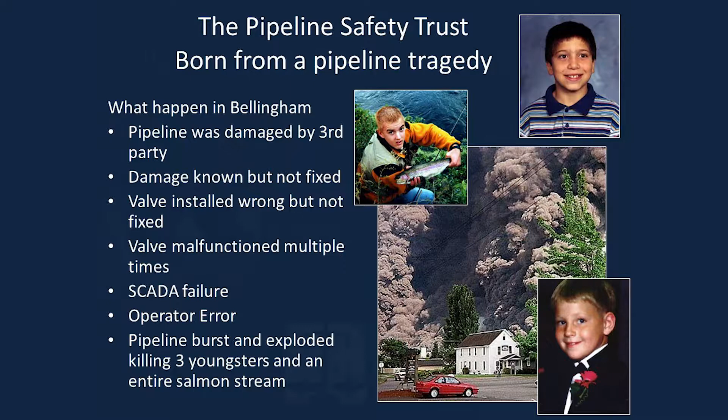As this case went forward, it was one of the few cases that has gone to criminal trial nationwide, and pipeline officials actually went to jail for a short time over this. But as the U.S. Justice Department prosecuted this case, they joined with the parents who had lost their children, trying to set up a national watchdog organization to oversee both the pipeline industry and the pipeline regulators, because they joined with the community there and were pretty aghast at the way the pipeline company had failed to maintain their pipeline and the regulators had failed to correct anything.

In the past, since 1999, we've done a whole bunch of things trying to improve pipeline safety. We're not against pipelines, we just want them to be as safe as possible. We've spent a lot of time in Washington, D.C., because all of the pipeline safety regulations start from there. So we're trying to improve the regulations. We've also tried to improve the transparency and the amount of information that's available.

In 1999, you couldn't find anything about pipelines on the internet. These days, there's so much available, in some part because of our efforts, that it's sometimes hard to know what to look at. We provide a public interest voice to the media a lot. I just talked to a couple of reporters just this morning. And then we partner with anybody that's trying to move safety forward, whether that's the industry, the regulators, or community groups. And we help with technical assistance like we're doing here this evening.

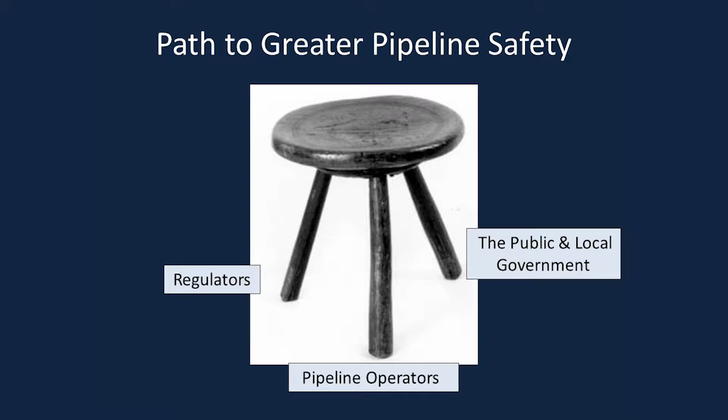One of our key beliefs is that pipeline safety is like a three-legged stool. To really have a stable pipeline safety system, you need all three legs. The operators and the regulators have strong legs because they have a key role in safe pipelines. The leg that's often missing in action is the public, and when I say the public, I also include local governments. Oftentimes, nobody thinks about pipelines until something goes very wrong or until there's a new pipeline being forced through a community. So we're really trying to strengthen that third leg of the pipeline safety stool.

Just to give a broad overview of pipeline safety, both in the country and in Contra Costa County, there are really two types of pipelines in the country. There's hazardous liquid pipelines, and those carry things like crude oil, refined products, gasoline, diesel, jet fuel, carbon dioxide, ammonia, and highly volatile liquids, which are things like propane and butane that are gas at atmospheric pressure, but when put into a pipeline under pressure, they move through as a liquid. So they fall under the hazardous liquid regulations at that point.

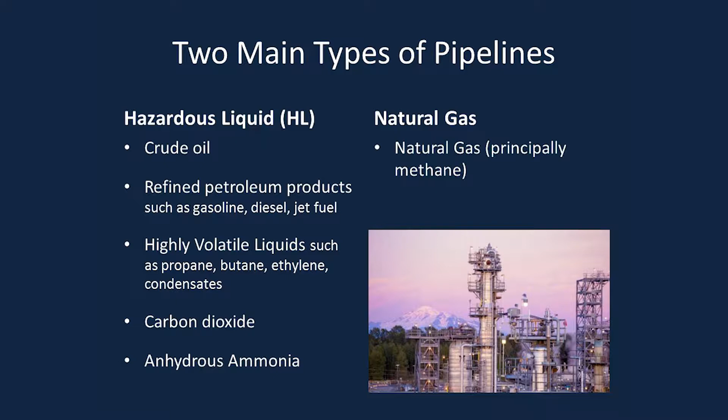The other main type is natural gas pipelines, like the gas we use in our homes, which is mainly methane. This shows a diagram of a typical natural gas system. On the left-hand side, the red lines are at the production side of natural gas where it's coming out of the wells, production and gathering lines. The blue lines are the big high-pressure transmission lines that move natural gas between communities, between states, across the country.

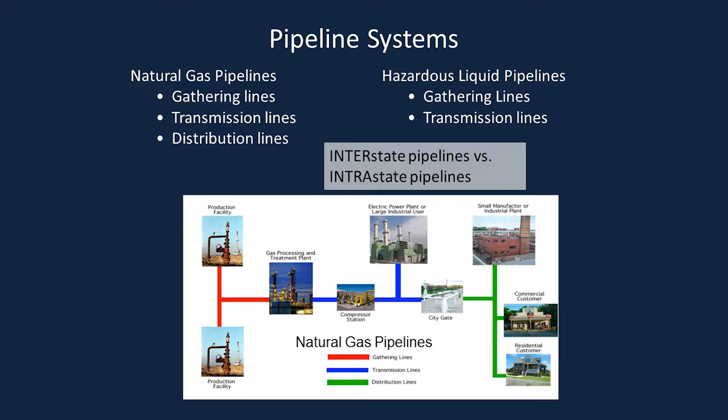As it comes into our cities, it goes through a thing called the city gate, which is a place where they put a lot of meters so they know who to charge for the gas. They step down the pressure, so it's a much lower pressure system in the distribution system, and that's the green lines there, the distribution gas lines. Hazardous liquid pipelines have a pretty similar system, other than they don't have the distribution green lines, because hardly anybody has a small pipeline bringing gasoline to their homes.

The other thing to remember about pipelines is there's both interstate and intrastate pipelines. The difference being interstate ones cross state borders for the most part, and intrastate ones are within one state border. That makes a lot of difference because the regulations change based on whether you're inter or intra, and the regulators also change. You'll be hearing a little bit more about this.

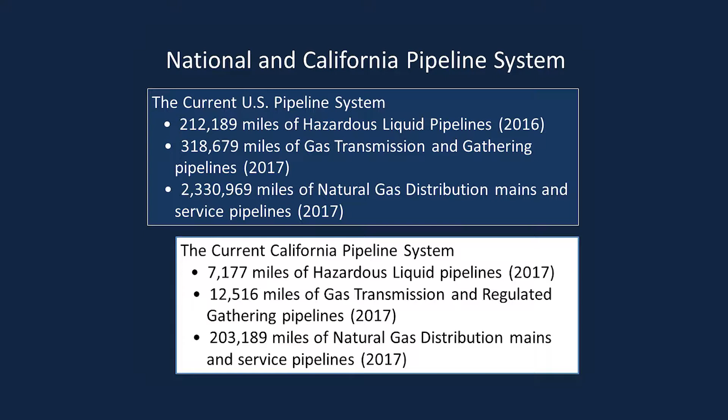Just another slide that shows the commodities here in California and the percentage of pipelines that are made up moving different commodities. Again, natural gas has the most, and then crude oil, pipelines taking crude oil to refineries mainly, and then taking refined products out from the refineries, delivering it to consumers.

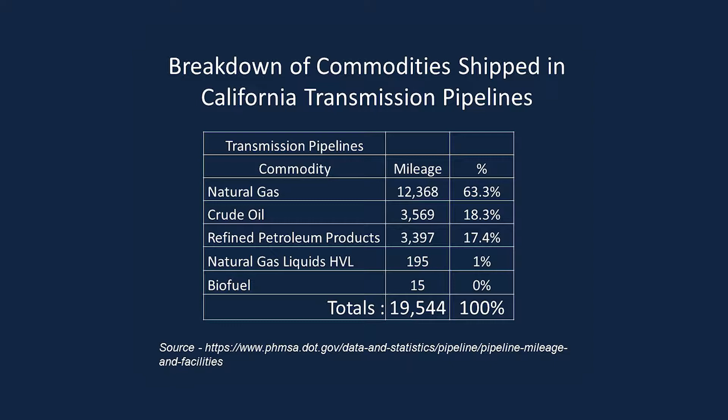One of the things that surprises many people is what pipelines are made out of. I think people think of pipelines and they think of steel or metal. The reality is that in the U.S. and in California, over half of the pipelines are actually plastic these days, with just about all of that plastic being in the gas distribution system because it's smaller, low-pressure pipelines. Plastic is easier to work with, it's cheaper in many circumstances, and it has some benefits like it doesn't corrode like metal does.

People wonder where the pipelines are in their community. The federal government has a national pipeline mapping system; that's the address for it there. Anybody can get online, put in your state and your county, and look to see where pipelines are. That's what comes up for Contra Costa County. The blue lines are natural gas, the red lines are hazardous liquid pipelines. You can see you have lots of pipelines in Contra Costa County because of all the energy facilities you have here in the county.

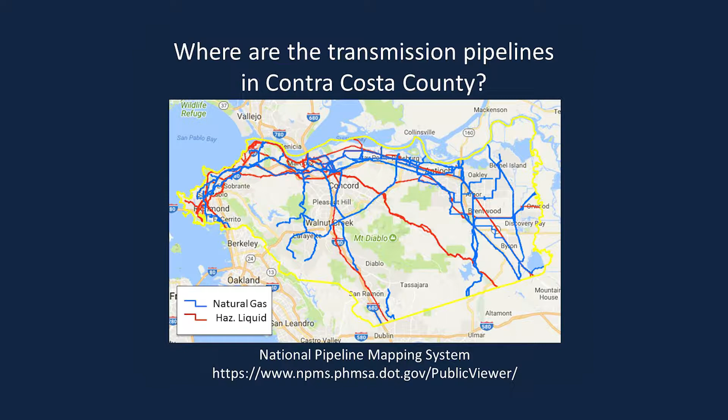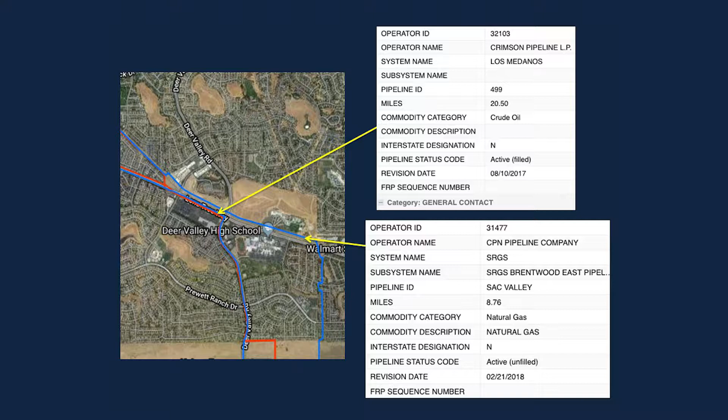Once you learn how to use the system, you can click on the different lines and get some basic information. The blue line running right out in front of us here is the CPN Pipeline Company, which I think is a subsidiary of Calpine, a natural gas pipeline in the area. The red one is a hazardous liquid pipeline, the Crimson pipeline, both running right past here. It gives you some basic information about what's in the pipeline and who to call if you think there's something wrong.

One of the things people get confused about is who regulates pipelines, and it's kind of a patchwork. The federal government, the Office of Pipeline Safety within the Department of Transportation, sets the minimum safety standards for all the pipelines in the country, and they control who regulates pipelines throughout the country. States can ask for authority to control intrastate pipelines or even to inspect interstate pipelines. California is pretty unique because they've asked for that authority on intrastate pipelines, but they divide it between two different agencies, with the fire marshal overseeing hazardous liquid intrastate pipelines and the California Public Utilities Commission overseeing natural gas intrastate pipelines. It's the only state in the nation that has two different agencies overseeing pipelines. Most states just have one agency, and many states don't provide any oversight on hazardous liquid pipelines.

The regulations really start in Washington, D.C. with Congress — that may be reassuring or may not, depending on your view of Congress these days. They set the overall statutes that establish pipeline safety standards, and every 4 years they update the National Pipeline Safety Act, which they're gearing up for right now. Then the U.S. Department of Transportation takes those statutes and turns them into enforceable regulations for all the interstate and intrastate pipelines as the base standards.

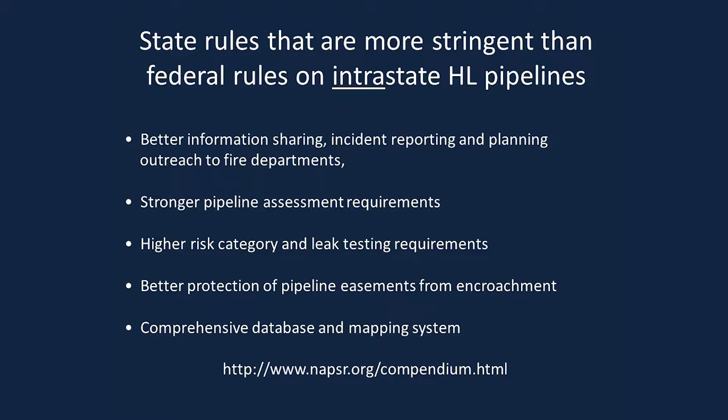The California Public Utility Commission has done some of the same stuff, going above and beyond the national rules. They have better reporting requirements for pipeline operators, and require them to meet with local fire departments for emergency planning purposes. I'm sure living here you know about the San Bruno tragedy — out of that, there were lots of issues about comprehensive pressure testing, and the CPUC has created stronger regulations requiring pressure testing that go way beyond what the federal government does, along with some rules for automated shutoff valves that can shut down more quickly in high consequence areas.

A couple things to remember about regulations - I think this is true both with the federal regulations and the state regulations. There's often multiple layers of rules that serve to protect the same issue.

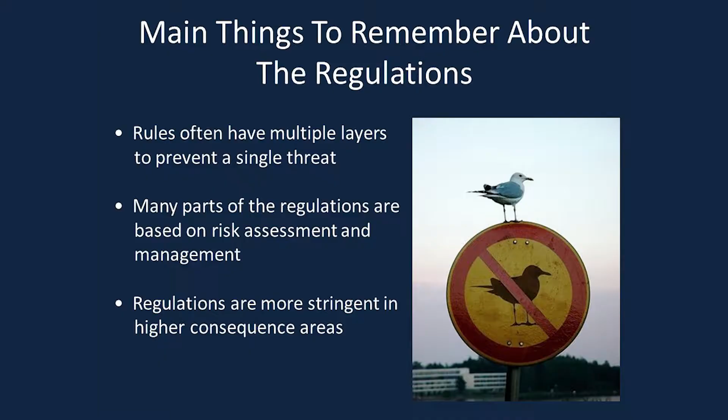One good example of that is corrosion. It's a big problem on metal pipelines, and there's multiple layers - rules that govern what type of coating you put on a pipeline and how you maintain it, rules about cathodic protection, which is a low current they put on pipelines that counteracts corrosion, and rules about how you deal with liquids that get in pipelines. So multiple layers of regulations help counteract any single threat.

Many parts of the regulations are based on risk assessment and management. No two pipelines are in the same location and have the same risks, so a lot of the regulations are geared towards making sure a company assesses their risks and then mitigates them, because every pipeline's a little bit different.

Oftentimes the regulations are more stringent in what they call high consequence areas. For natural gas pipelines, high consequence areas are based on population density - the more people that live close to a pipeline, the more stringent the regulations. For hazardous liquid pipelines, it's population density but also environmental factors, because if the stuff spills out it can cause a real mess. So if you're near drinking water sources or environmentally sensitive areas, those are high consequence areas, and the regulations are more stringent.

Many of the rules are a combination of prescriptive versus performance-based rules. An example is the speed limits on the highways - that's a prescriptive regulation. You see the sign, 70 miles an hour, you know exactly what you're supposed to do, and the state patrol knows exactly what to do with you if you're going over that.

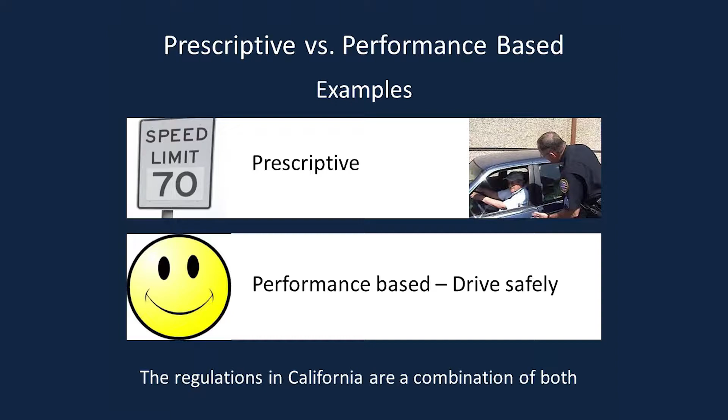A performance-based regulation is a little different. If you wanted to turn the speed limits into performance-based, you'd take down all those speed limit signs and put up a smiley face sign that just said 'drive safely.' It tells people what to do, but it's not quite clear exactly how you would do it - it may have just as good an effect. In California and in the nation, regulations are kind of a combination of prescriptive and performance-based.

Want to spend a little bit of time talking about risk of pipelines. Everybody assesses risk differently.

I was heading to Ohio to talk about pipelines a couple weeks ago. It was just after Southwest Air had their problem on one of their airplanes where an engine blew out, cracked the window open, and a woman was killed when she got sucked halfway out the window. Two weeks later, I was on a Southwest airline heading to Ohio, and I'm sitting in the same seat, on the same type of airplane, looking at the same type of engine. I fly a lot - my risk assessment, I fell asleep before we took off the runway. I took a picture once we were in the air and sent it to my wife, and I regretted that because she hates airplanes altogether, and I heard about my risk assessment when I hit the ground.

So everybody assesses risk differently, which is why we won't tell you whether the pipelines here are safe enough, because you have to make up your own mind about that. But there's a lot of ways you can look at it.

The industry and the regulators often talk about the probability of something going wrong, and the public tends to concentrate on the consequences when it does. So you'll hear the industry talk about how 99.9999 whatever percent of fuels move safely through pipelines - that's absolutely the truth. The public, on the other hand, concentrates on the 0.00003% when something goes wrong, like it did in San Bruno or Marshall, Michigan, where 1 million gallons of oil got dumped into a river.

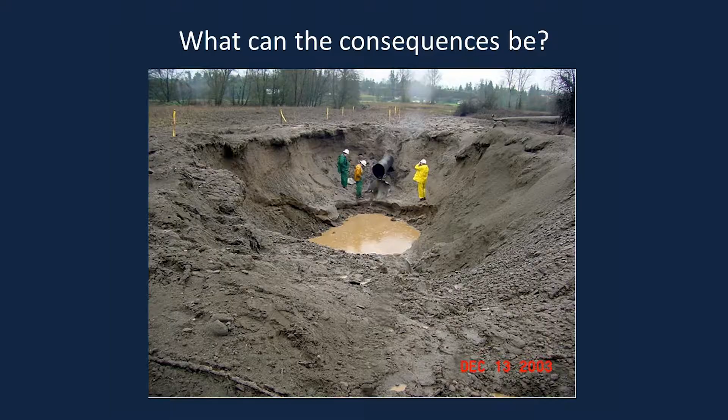Sometimes natural gas pipelines don't even catch fire or explode. This is a picture of a gas pipeline up near us in Washington State. There was no explosion and fire with this - this is just the pressure of the gas coming out of that line that dug this pit. You can see in the right-hand corner the piece of pipe that's missing - it threw it that far in the air. So the pressure, especially of these natural gas pipelines, can do quite a bit of impact damage even if there isn't a fire or explosion. In the majority of the time, pipelines don't explode or catch fire.

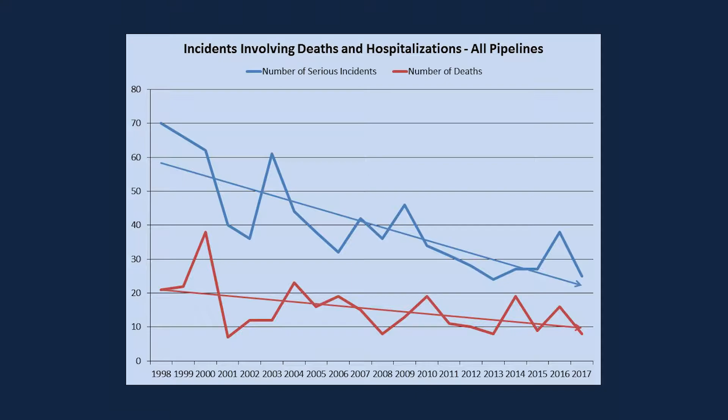The good news is when you look at incidents that kill or hospitalize people, all of the trend lines are going in the right direction. The blue line is those incidents that include hospitalization or deaths, and the red line are just the deaths. With 2.7 million miles of pipelines nationwide, we're really down around 10 deaths or so a year on average, which makes it much safer than all kinds of other things you do, like driving down the highway to come here this evening, or even people that slip and fall in their bathtubs. So pipelines are relatively safe.

Hazardous liquid incidents - these are all the ones that have happened in Contra Costa County since 2002. You can look this stuff up, it's all available on the federal government's website, and get a lot more information than we provided here. But you can see even with all those in Contra Costa County in the last 15, 16 years, there's only one of those that had any deaths or injuries. That was the one in Walnut Creek back in 2004. The rest of them are on the list because of the amount of property damage they did.

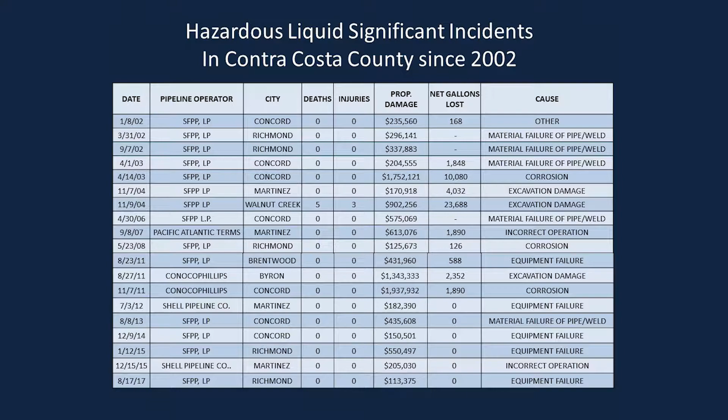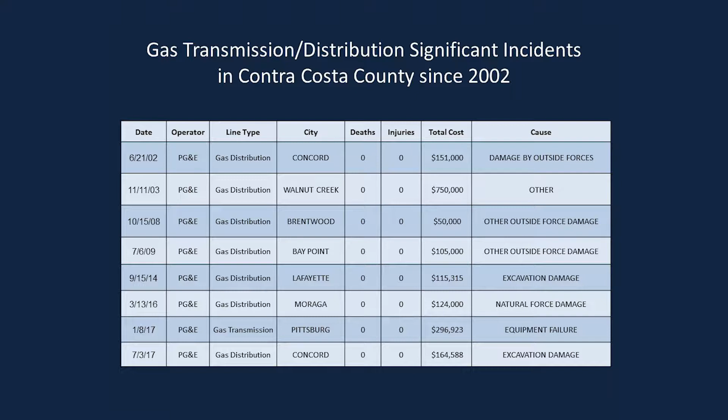Here's the same list for the natural gas transmission and distribution pipelines. There's been fewer of those, and there have been no injuries or deaths for those. They're all on there just because of property damage.

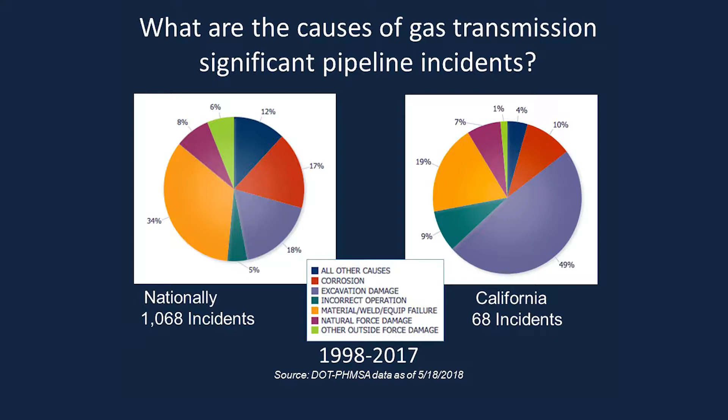Same graph for gas transmission, the big high pressure gas pipelines. These graphs look a little bit different, and particularly in California, you can see that 49% of the failures are from excavation damage. And that, again, is just a function of how many people live close together here in California and the ability to strike a pipeline fairly quickly.

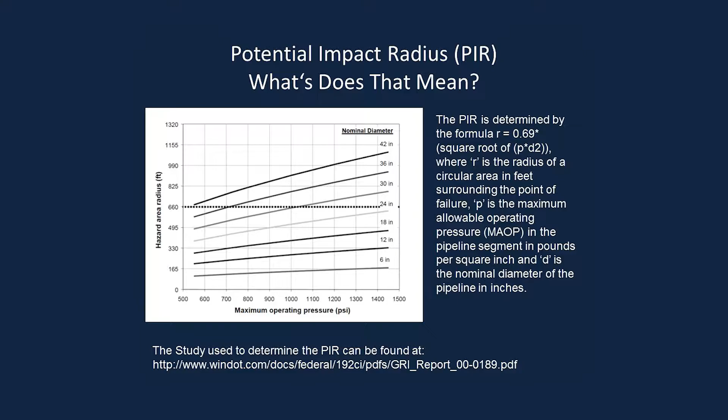That radius is basically figured so that if you're standing in the open when a big gas transmission pipeline fails, if you're within that circle or radius, the chance of significant injury or death would be high. If you have a wooden frame structure within that circle, the chances that structure would burn down are high too. It's really just a function of the size and pressure a pipeline is operating at - the bigger the pipeline or the higher the pressure, the bigger that impact radius would be. It's pretty easy to figure out if you can get the information.

One of the problems is that often the information about the size and pressure of the pipeline isn't provided by the pipeline companies, so it takes some sleuthing to figure that out.

Here's just where we're sitting this evening. If the gas transmission line blew up out there, I don't know what size or pressure that is. The red circle shows an impact radius if it was a small 8 or 10-inch pipeline operating at a low pressure. The yellow circle would be an impact radius if it was a 24-inch pipeline operating at 800 psi. So that impact radius varies a lot depending on the size and pressure of the pipeline.

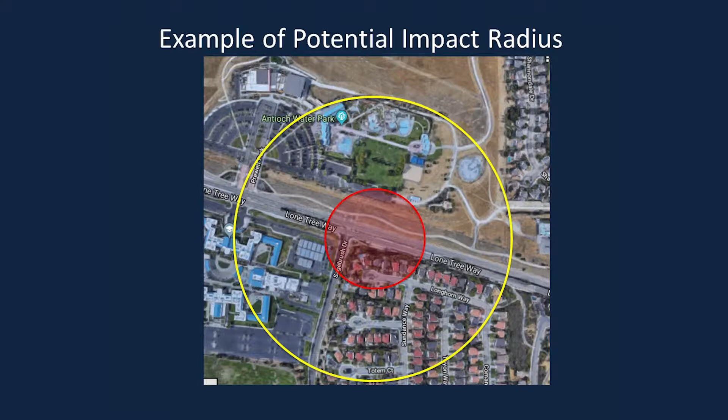You can't do the same thing for hazardous liquid pipelines, because when they break, they tend to flow based on the topography and stuff, so you can't really come up with an impact radius without doing a whole lot of modeling for hazardous liquid pipelines.

You can use national statistics to figure the probability of things going wrong. If you look at all the gas transmission statistics nationally, what you would expect in California is to see a significant incident 2 or 3 times a year. In reality, when I looked at California's significant incidents, you've had 4.3 significant incidents a year, so you're a little higher than the national average. But I think that's because there's a whole lot more people crammed together here in California than in places like Wyoming, Montana, and South Dakota.

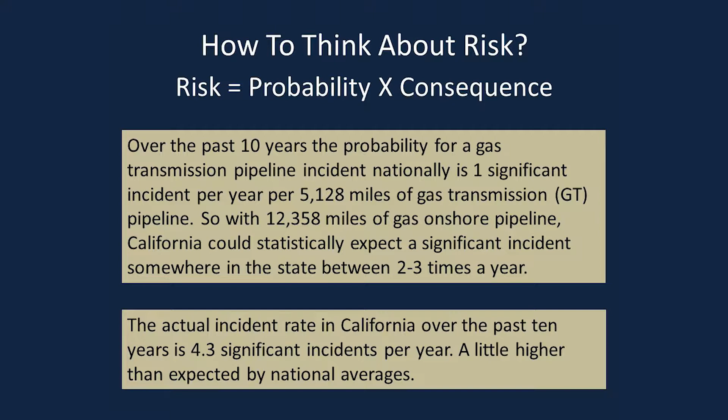Same with deaths. If you look at the statistics, you would expect a gas transmission incident leading to a death once every 22 years, more or less. In California, you've had 4 incidents in the past 20 years that have involved deaths. So again, you're kind of ahead of the national statistics.

One of the things the federal government has made possible, as another way to look at the risks of pipelines, is comparing individual pipeline companies with one another. They've just put this up in the last couple of years. What's on the slide now is looking at hazardous liquid pipelines. The 2 columns show a 5-year average for accidents per 1,000 miles and a 3-year average for accidents per 1,000 miles, with the highest rate at the top and the lowest at the bottom.

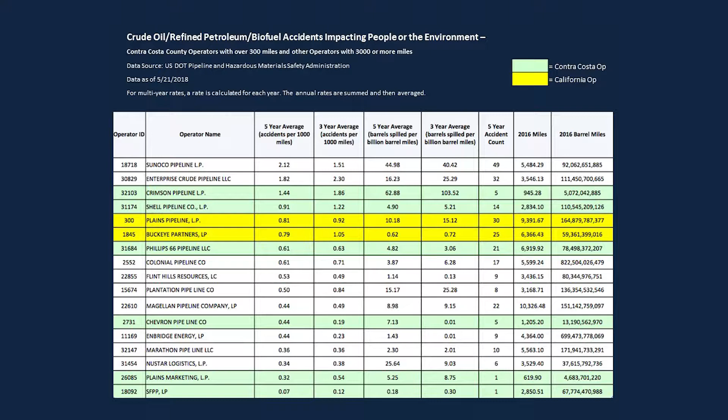The ones in green are Contra Costa County, yellow are California, and the white ones are other large pipeline operators nationally. If you look at the very bottom, the SFPP system - that's the Kinder Morgan pipeline here in Contra Costa County - they have the lowest rate on the chart, which is good news, so they're doing something right to control their incidents. Some of the other ones, like the Crimson pipeline that runs right past where we're standing this evening, have a much higher rate. So that's another way to think about the pipelines.

Still, the chance of it happening in any one place is really, really small. Same thing for natural gas pipelines.

This is for gas transmission. If you look at gas distribution, you get the same kind of picture, with PG&E at the top of the list, where you'd like to see them at the bottom. Andy can probably talk about that a little bit this evening. There's probably lots of reasons for that, and I haven't dug into the data enough to understand that.

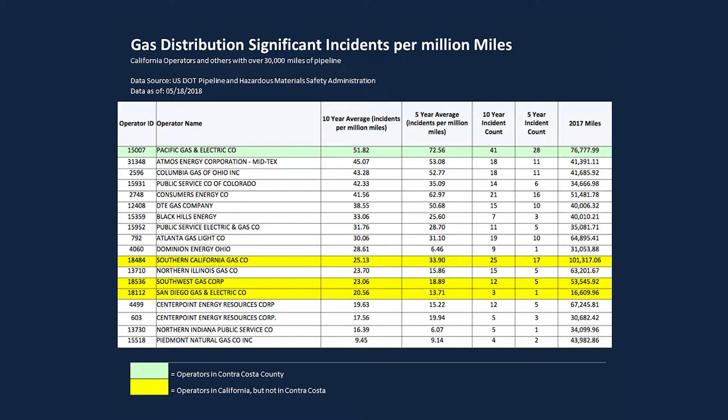A couple of last things I want to talk about is land use planning near pipelines. Pipelines tend to want to be in rural areas. They don't like to be near people if they can avoid it. So a lot of pipelines were built in places like this.

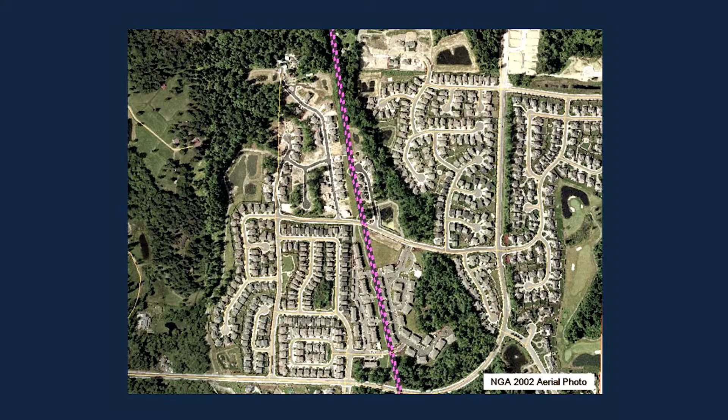This is a picture up in Washington State back in 1990. The next photo is the exact same aerial photo 12 years later. And what you see, and we see this all over the country, is we're building up and encroaching along pipelines. We're putting more and more people closer to pipelines, which increases the risk to those people.

The county just north of here, this is a picture from there, that's a jet fuel pipeline, the red dotted line. It was there first. None of the rest of this was there. I think the road was there, but none of the houses. The houses came next. They built those pretty close together. Very hard to get emergency equipment or heavy machinery in there if you need to do something along that pipeline. Wasn't a problem because you could come in from the back side.

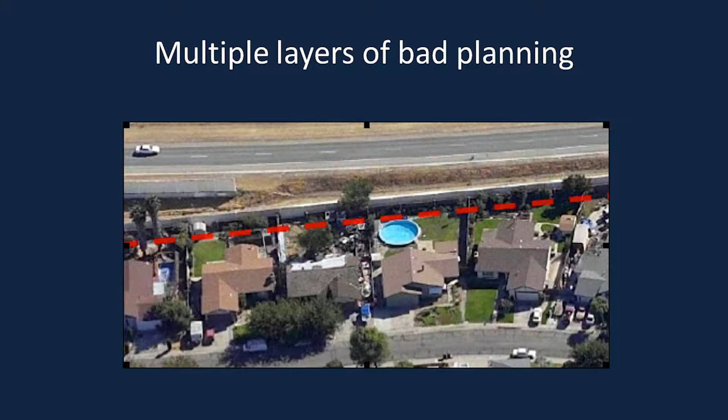But as the highway got expanded and the people living in the houses complained about the noise, the state transportation department did them a big favor by building that big sound wall you see there running along in their backyards, effectively sealing that jet fuel pipeline into their backyards. In the meantime, people have been building swimming pools on top of the pipeline, sheds on top of the pipeline, planting trees on top of the pipeline. So basically, increasing the risk.

The pipeline company hadn't been paying attention and maintaining their easement as they could have, and local governments didn't think about any of this as they were expanding the roads or allowing the housing developments to go in. I think that pipeline has been abandoned since, and it was a military pipeline for Travis Air Force Base, so it wasn't overseen by any of the regulators in the room.

The federal government recognized this problem with development along pipelines and created the Pipelines and Informed Planning Alliance a number of years ago that came out with a bunch of recommendations that they were hoping local governments would look at and adopt. Hasn't been very successful because local governments tend not to think about pipelines until something goes wrong. So there's lots of work to do, and that's something the public can help with.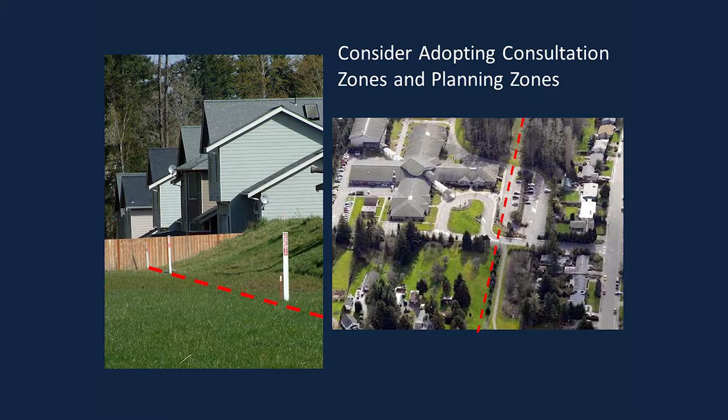The families that had kids there after the Bellingham incident, the school district has since started to try to address that, but it took a tragedy to get people to think about that, where local governments could do a lot to encourage that. Lots of information about planning your pipelines from groups like FEMA and certainly the federal regulators.

And I just want to finish talking about what the public can do. You're going to hear from all these gentlemen talking about the benefits of the Call Before You Dig system, 811. It's a free system all over the country. Anytime anybody's going to excavate, even if it's just with a shovel in your yard, you should be using the 811 system to make sure people aren't hitting pipelines. It works very well, and that's why I think you see the declining rate of incidents on gas distribution pipelines, because of some of the success of the Call Before You Dig system, something the public has a clear hand in.

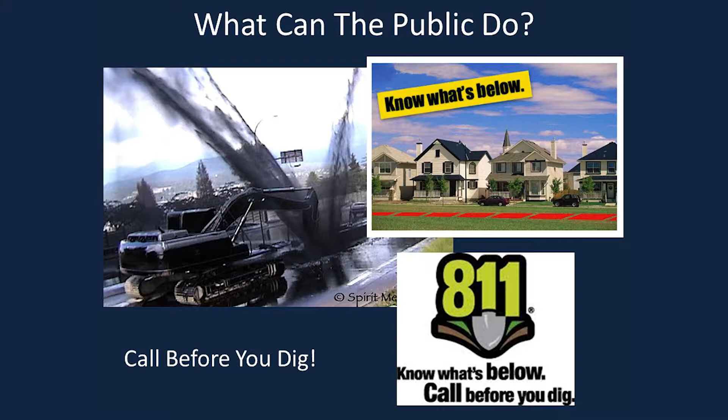So the final thing the public can do is certainly help us ensure that there's that third leg of the stool to give us a clear, strong pipeline safety system, and engage with your local, state, and federal officials on what you think about pipeline safety.

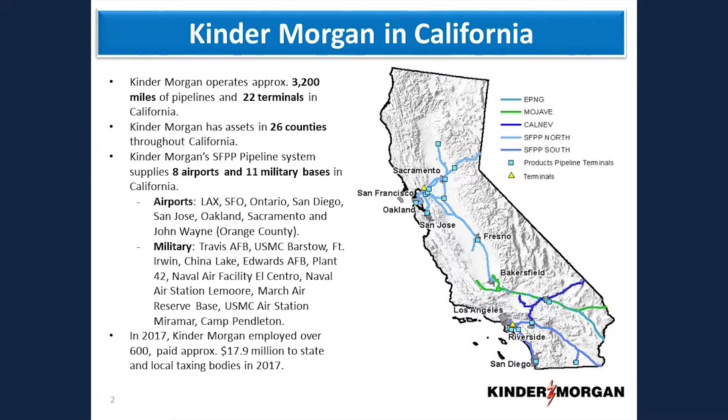Our pipelines too - we're able to put multiple products on one particular system through a process called batching. So at any given time, including the pipelines here in Antioch, could be transporting gasoline, diesel, jet fuel, one product after another. There's a process for doing that, but it allows us to have fewer pipelines and get more product on one pipeline, which I think is good for all concerned.

This is a closer map of Antioch. We have two pipelines, a 10-inch and a 12-inch - 7.2 miles on the 10-inch and 4.3 miles on the 12-inch. Again, these are delivering gasoline, diesel, and jet fuel from one place to another, from one tank to another tank.

And again, at those tank farms, trucks will be coming up delivering that gas to market. So chances are, including the gas stations here in town, that product came from our pipeline system, if you're driving a car and filled up at one of the gas stations in the area.

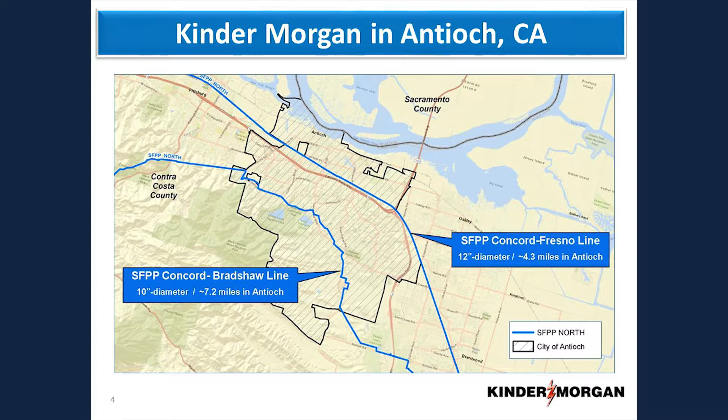A little bit about safety. Safety is, as the other speakers will talk about, the number one priority for our company and for all energy companies. A variety of techniques are used to make sure we have safe pipelines. We monitor our pipelines 24 hours a day, 7 days a week from our control centers. We have a system of valves, whether automatic, remote, or manual, or a combination, to make sure we can control the flow of product in case of an incident.

We have an internal inspection tool - we're going to have a video towards the end of the program tonight about how that works and how those inspection tools work. We patrol our lines, both from the air and from the ground, regularly, usually on a weekly basis in the area. So a wide variety of techniques and processes are used to keep our pipelines safe.

This is also a heavily regulated industry. Carl talked about a number of the agencies, the State Fire Marshal and PUC here tonight, but a number of other California agencies, including State Lands, Caltrans, the state environmental agencies, and even your local and city governments. Cities like Antioch can have franchise agreements that have some regulatory authority over pipelines, as well as the counties through building permits and other processes they may have.

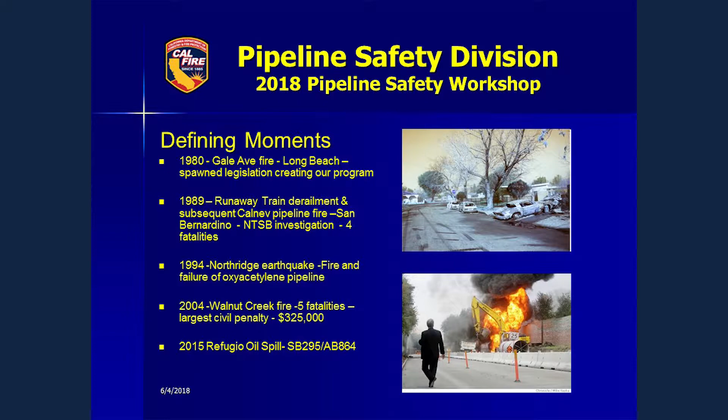Several defining moments within our program: 1980, the Gale Avenue incident. In 1989, we had the runaway train derailment in San Bernardino. 1994, the Northridge earthquake. 2004, the Walnut Creek incident. And just recently, the Refugio oil spill, which drove SB 295 and AB 864. That also caused more work for our department, which is a good thing.

The State Fire Marshal is directly responsible for regulating the safety of approximately 6,000 plus miles of hazardous liquid transportation pipelines and 42 operators within the state of California. The Pipeline Safety Division consists of 21 engineers with analytical staff and clerical support located in both Northern and Southern California. The division is mandated by state law to exercise exclusive safety, regulatory, and enforcement authority over intrastate hazardous liquid pipelines, and also acts as the agent for the Federal Office of Pipeline Safety, which handles interstate, while we handle intrastate.

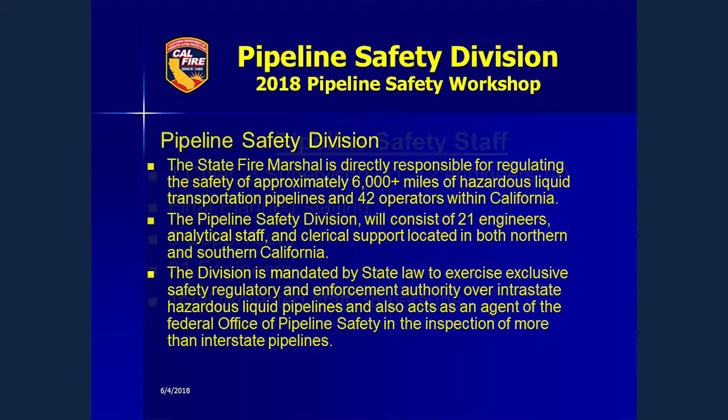Currently, our staffing is 1 chief, 3 supervisors, with plans to add another one, and 12 engineers, with plans to eventually hire 4 more into the department. The final planning staffing target is 38 total personnel in the department, with 5 supervisors, 21 engineers total, and that total projected there.

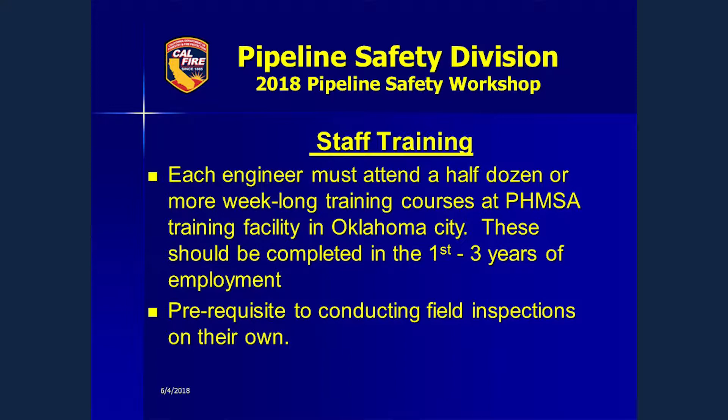Training is always key for your people. Each engineer must attend half a dozen or so classes, each about 40 hours, a week long, at the PHMSA training facility in Oklahoma. These should be completed within the first 3 years of the engineer starting in the program. The final goal is that within 5 years they're fully trained, but usually we're able to get there in 3. These are prerequisites required before an engineer can go out in the field and lead an inspection.

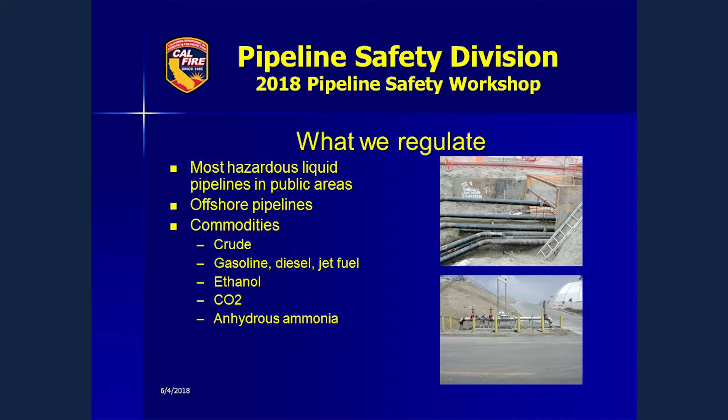So what do we regulate? Most hazardous pipelines in public areas, offshore pipelines. Commodities are crude oil, gasoline, diesel, jet fuel, ethanol, CO2, and anhydrous ammonia. For field inspection activity, we review operator qualifications, public awareness programs, construction and design, emergency response plans, operation and maintenance records, drug and alcohol programs, and integrity management programs.

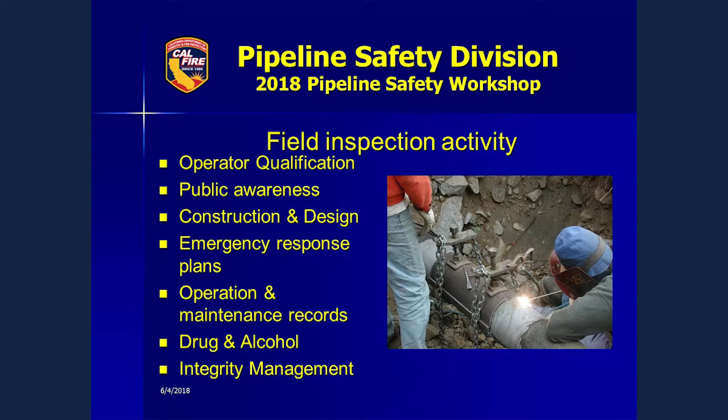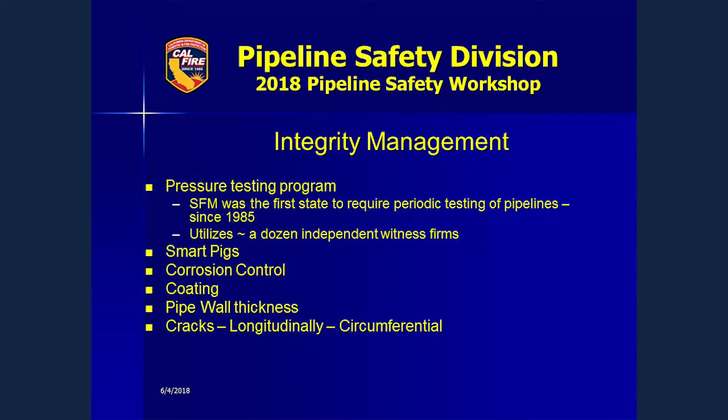For integrity management, we have a pressure testing program. The State Fire Marshal was the first state to require periodic testing of a pipeline since 1985. We utilize independent firms that apply to the department and are authorized through us to be approved testers for the pipeline. So if Kinder Morgan needed to pressure test one of their lines, they would not do that themselves. They would call in a qualified independent tester to certify the test for them.

Smart pigs are effective with corrosion control. They identify failures with coating and external corrosion. They look at pipe wall thickness, and they can also look at cracks longitudinally and circumferentially on the pipeline.

Our engineers are on call 24/7. The Office of Emergency Services is notified of all pipeline spills, including train derailments. We do respond to those as well if pipelines in the area may be threatened. The OES then contacts us. We've implemented a new plan where the engineers are on call and the supervisors monitor. Each notification is checked into our pipeline mapping system, and then we decide whether to contact the operators if the pipeline is within 500 feet of the derailment. We communicate with the operators and decide if we need to send additional personnel out into the field.

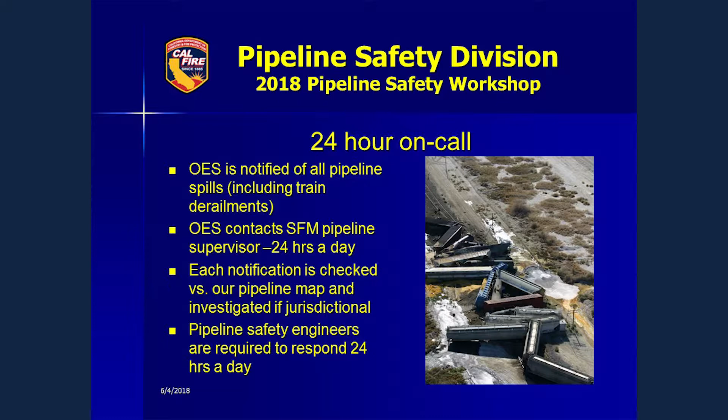We have a GIS mapping program, which was alluded to earlier. We can provide this information to local and state governments. We respond to over 1,300 annual requests for pipeline location information. It's centralized data and mapping information for all the pipelines and facilities within the state. I'm going to go a little bit quicker now because I'm running out of time.

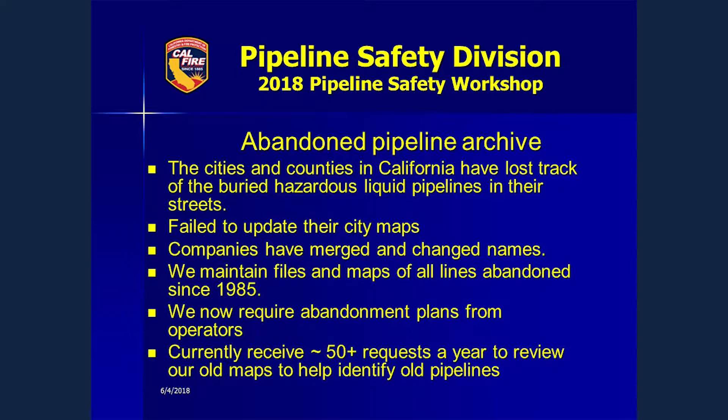We have an Abandoned Pipeline Archive. We're under federal audit, audited annually. Our guiding principles are to strive to excel in customer service, protect the public and the environment, develop cooperative agency and industry relationships, treat industry fairly and objectively, treat employees as family members, and educate, train, and enforce. Major regulations include SB 295, which essentially means every pipeline will be inspected every year.

AB 864, the goal of AB 864 is to protect environmentally sensitive areas and state waters and wildlife by reducing the amount of hazardous liquid released in a spill within the coastal zone.

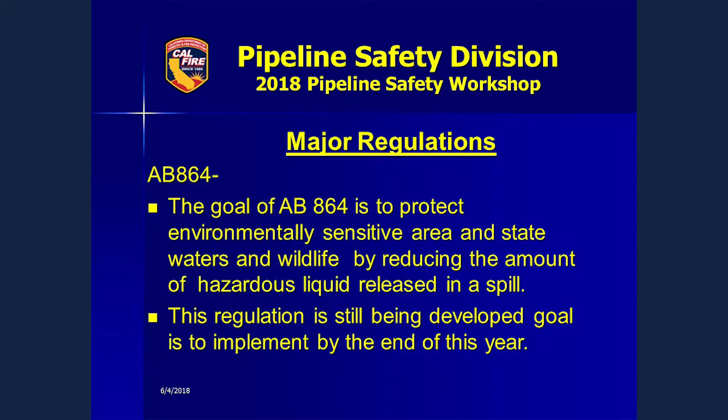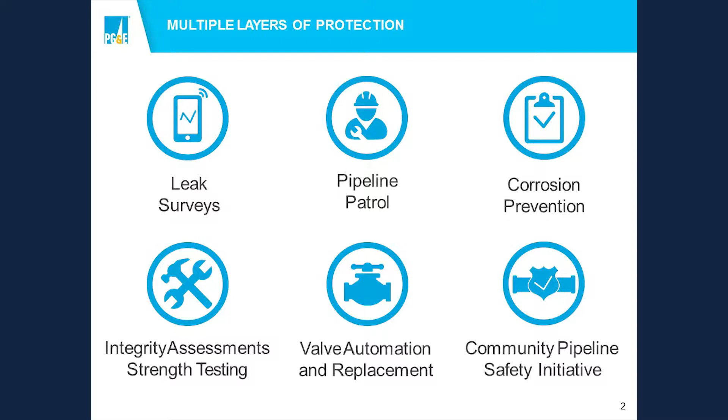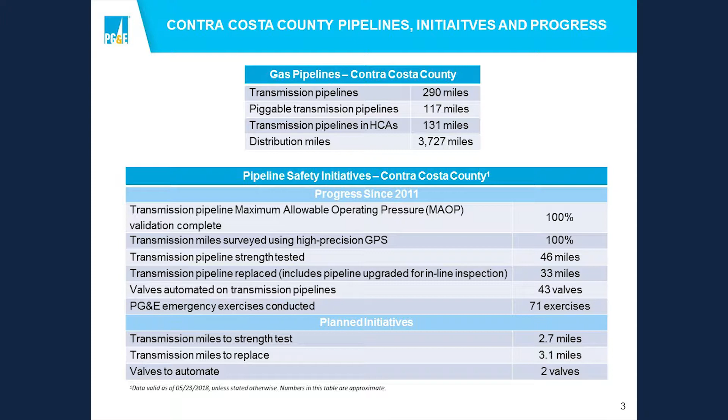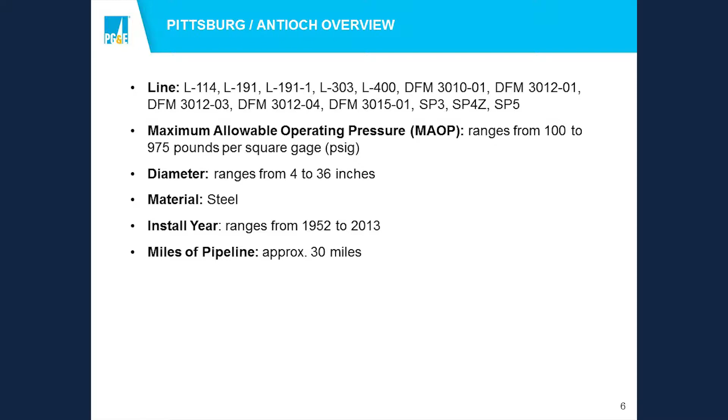What happens when a pipeline goes through a densely populated area is we lower the maximum allowable operating pressure so that we put less pressure in the pipeline. It increases the safety factor of the pipeline, and that's something you can be aware of. Because of that terminal, we've got some higher pressures over there, but through your communities, the pressures are much lower than the listed top pressure here at 975 pounds.

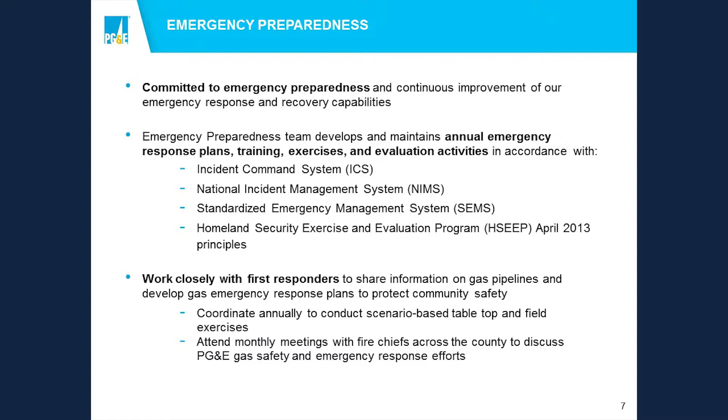Our emergency preparedness program is very aggressive, and it trains all of our employees on standardized responses to emergencies. This slide will go up on the website too. I'm flipping through it kind of fast here because of time, but all of this will be available on the web. The last thing I want to talk about is our damage prevention program.

Carl mentioned our damage or incident history. Our actual damage history in the last several years has gone down significantly. It was over 3.5 damages per 1,000 USA tickets at the time of San Bruno in 2010, and now we're down at 1.81. We started in the 4th quartile in the industry, and we're down in the 1st quartile now.

I'll probably have time during the question and answer period to go into this in a little more detail, but suffice it to say, our damage records for third-party damages on our system, which is by far our biggest threat, are improving year over year. We've come a long way, and we still strive every day to make our system safer. Thank you very much.

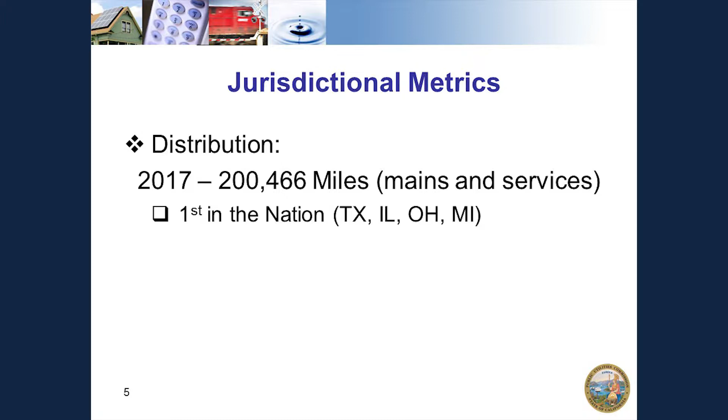California has about 200,000 miles of distribution pipelines and about 10,400 miles of transmission pipelines. Among those, we have what we call HCA, high consequence areas, meaning transmission pipelines that are in high consequence areas.

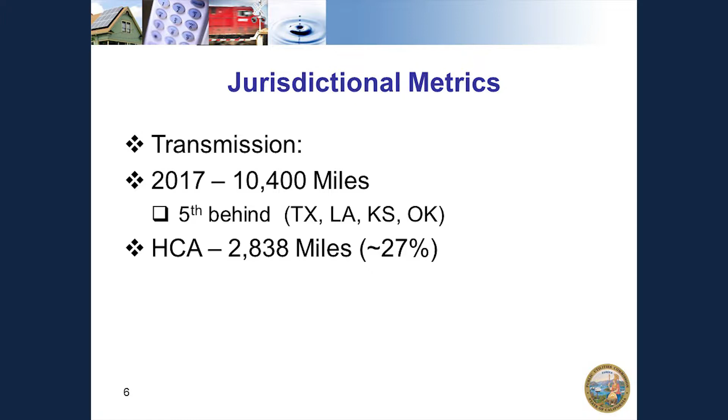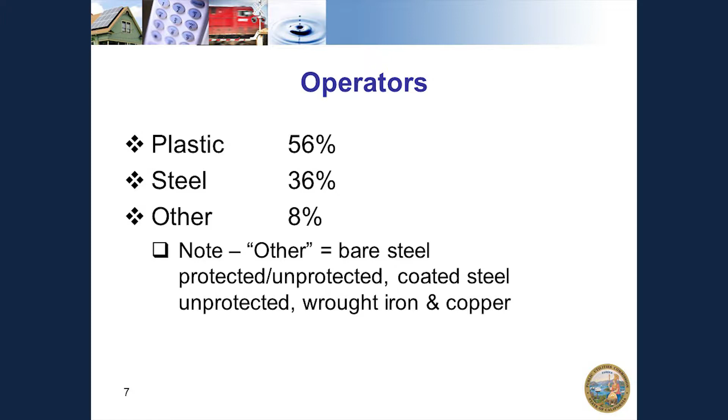Out of these many miles of pipelines, I believe Carl has already talked about this, how plastic consists of the majority of the lines used in distributing natural gas within the 50 states. 56 percent of those pipelines are plastic, and 36 percent is steel. Most of us usually think steel is the major material used for transporting natural gas and other commodities, but that happens to be plastic.

The Commission has jurisdiction over 11 natural gas operators and 11 storage fields. Some of the 11 natural gas operators own some of the 11 storage fields. We also have over 2,000 master meter operators and 651 LPG operators. Some of those LPG operators are master meter, and some of them also operate apartment complexes and resorts, etc. In addition, we have 11 municipalities.

The Commission's pipeline safety team has approximately 44 individuals. Among that are 34 engineers, 6 supervisors, and a damage prevention expert.

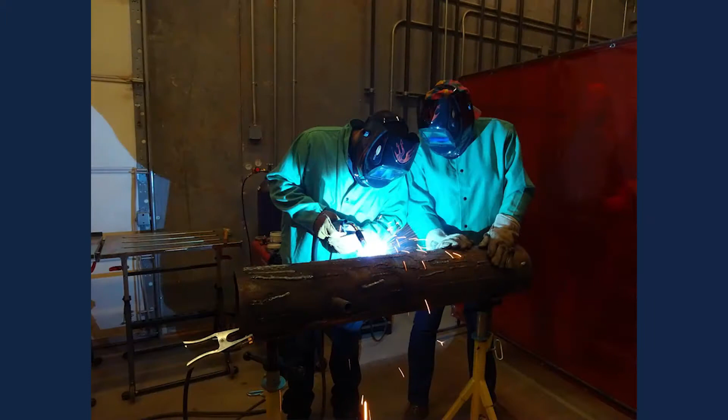Among the 34 engineers we talked about, there is a requirement from the federal government that those engineers be trained and certified in order to conduct the safety assurance inspections that we do. This is one of the trainings we had to undergo, a welding class, among many other types of training we have to do, both in classroom and hands-on training.

Our core work consists of inspections. These can be construction inspections or routine operation and maintenance standard inspections, and others. In addition, we do incident investigations, whistleblower investigations, and other types of inspection and safety assurance work. These are some of the inspection types that we do.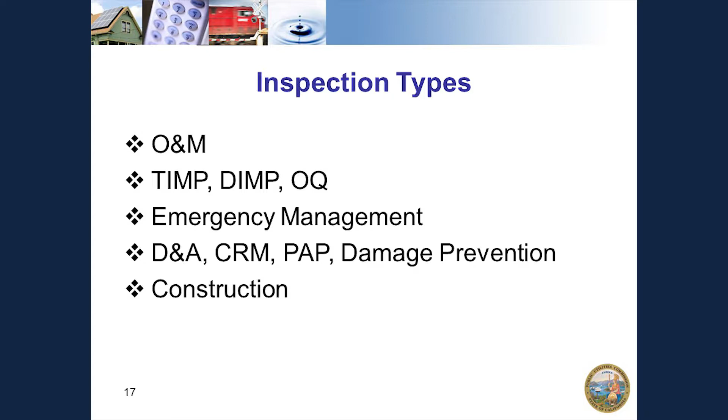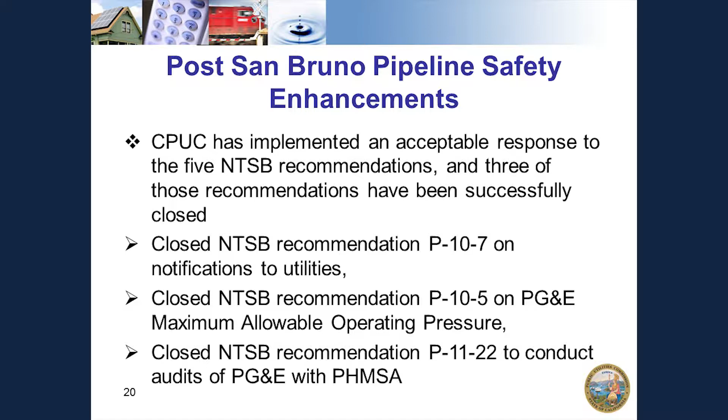After the San Bruno incident, the California legislature passed PU Code 958, which says that all transmission pipelines within the state that do not have a traceable, verifiable, and complete pressure test record must be either pressure tested or replaced. In addition, the Commission also had its own decision on how to implement this. To date, all operators have tested 875 miles of transmission pipeline, and out of that, 12 failed, which is a good thing because it's better to fail during a test than in operation.

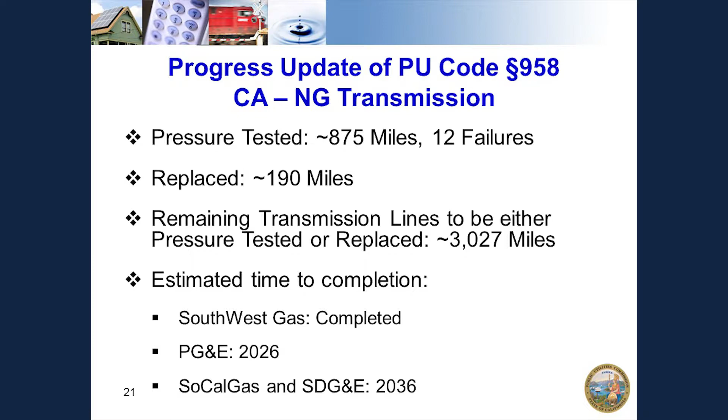There are about 3,000 miles of transmission pipeline remaining to be tested. Southwest Gas has completed it, but PG&E and Southern California Gas are still in the process. In addition, they're also installing automated and remote control valves. Thank you.

Can we just move it? Yeah. That would be fine.

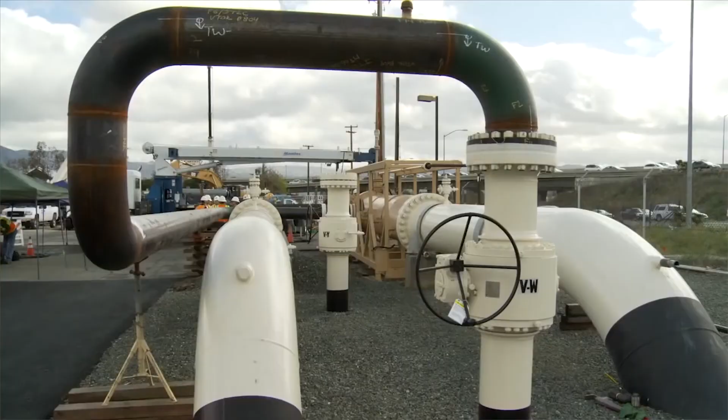At PG&E's Milpitas terminal, a high-tech tool known as a smart pig slowly moved into a pipeline launcher. From there, the pig began a 12-mile, 3-hour journey to inspect the inside of Line 101, which delivers gas on the San Francisco Peninsula. The tool was created especially for the project, as Line 101 has some tight bends. PG&E's Sumit Singh talked about the significance of the project.

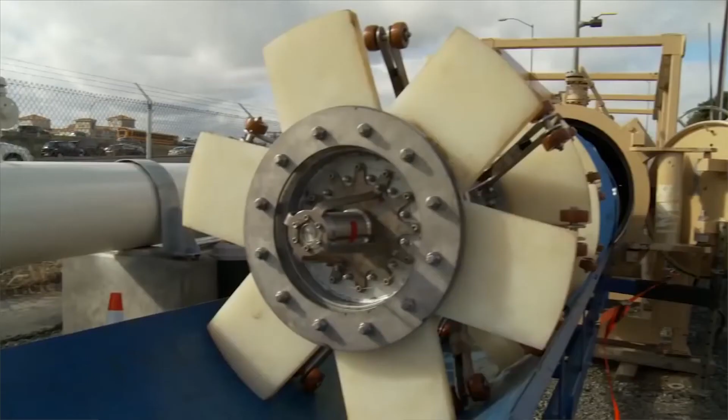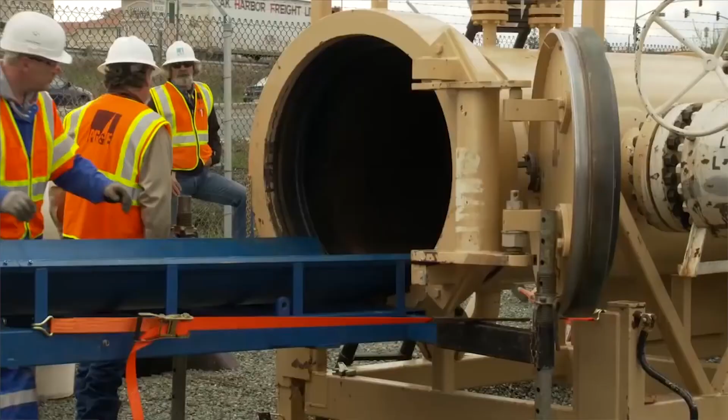For the first time in our history, we've launched an inline inspection tool on a peninsula pipeline at Line 101. The inline inspection tool assesses the integrity of the pipeline from the inside. It's analogous to going to a doctor and the doctor doing an MRI to identify if we have any issues on the internals and insides of us. The inline inspection does the same thing, to identify any corrosion or mechanical damage, and identifies the precise location so we can pinpoint, excavate, and repair the pipeline.

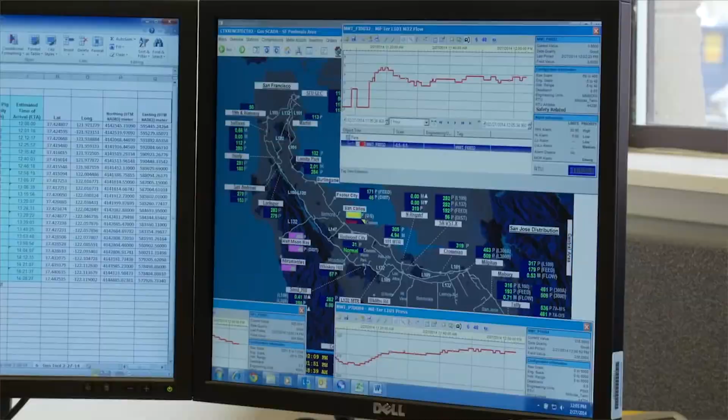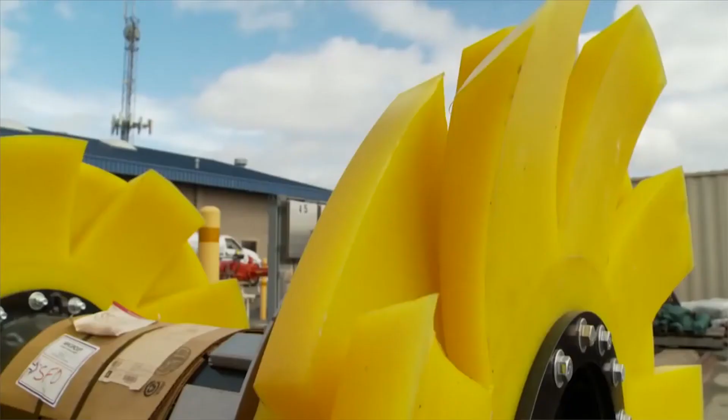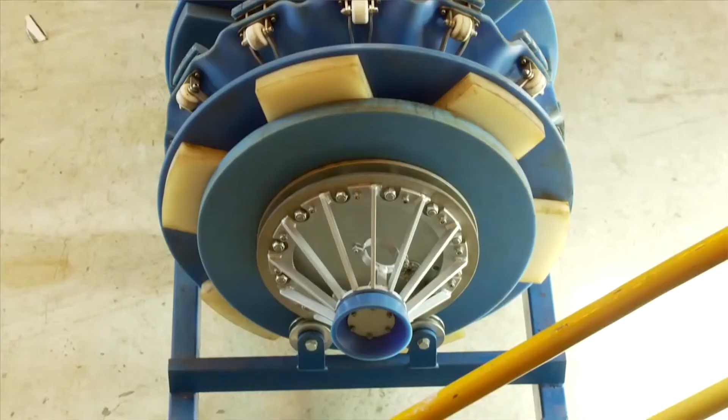Actually, 3 different inline inspection tools were used for this project. We run a series of tools, always starting with what we call cleaning pigs. Cleaning pigs have brushes and scraper discs built into the tool that allow us to clean the inside of the pipeline to ensure a successful smart pig operation. After the cleaning pigs are run, we move on to a geometry tool, which is what we're running here today. The purpose of the geometry tool is to look for dents and any other geometric anomaly associated with the pipeline. The third and final type of pig we run is what we call the MFL tool. The MFL tool has magnetics and sensors on board designed to detect and size any kind of metal loss associated with the pipeline.

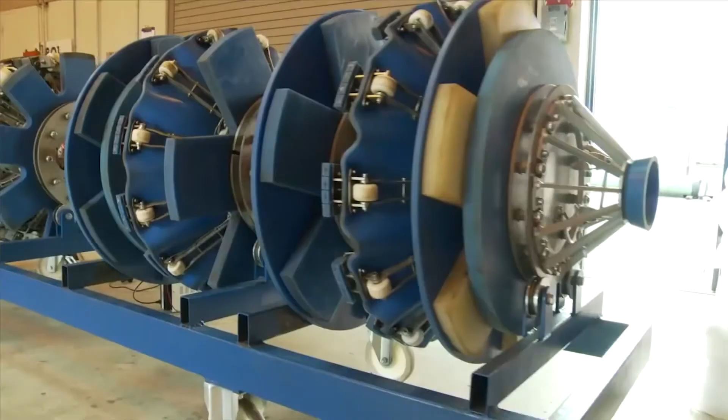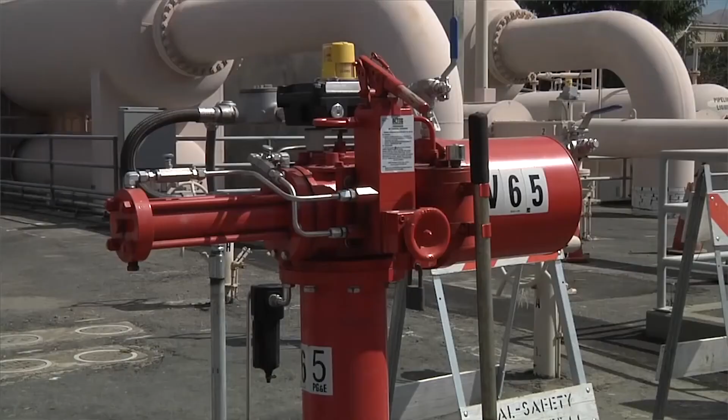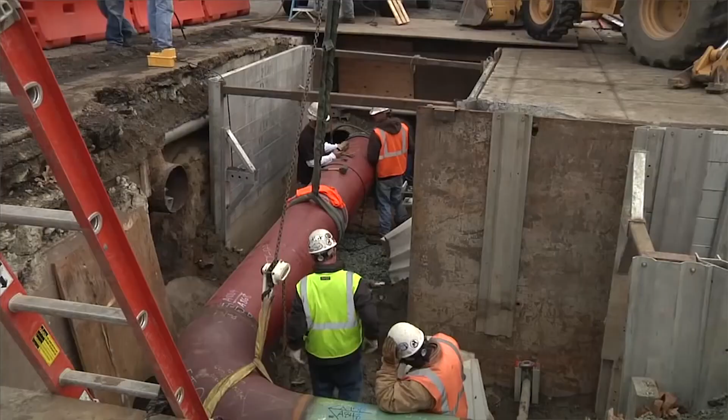Using smart pigs to inspect gas transmission pipelines is just one way that PG&E has been steadily improving its gas system over the last several years. In 2013, that included automating the 100th valve since 2011, completing nearly 200 miles of hydrostatic pressure testing, and replacing more than 60 miles of transmission pipeline. For Currents, I'm Matt Nauman.

I don't know if anyone had any additional questions, since we do have an expert in the audience. So do you have any questions about smart pigs? One comment: MFL stands for magnetic flux leakage.